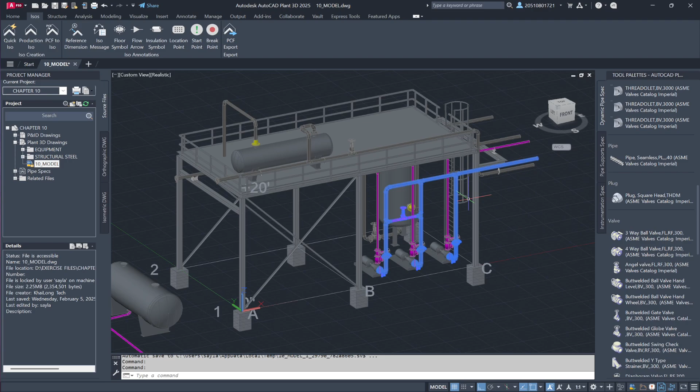Let's open Chapter 10 under Plant 3D Drawings and load the 10_MODEL. Next, locate line 200. Using the Add to Selection option, select the entire line. Right-click and choose Part Hiding/Isolation, then isolate selected parts. This isolates the line that we'll be working on.

Assuming the line is finished, there are several ways to secure it before issuing an isometric. If you need to prevent parts of the line from being moved, especially because it connects to pumps that should not change location, as those pump positions have been finalized and may be referenced in many other drawings, you can lock the pipe in place.

To demonstrate, I'll highlight the first piping run connected to pump C. With the Move Part grip activated, if I attempt to drag the pipe, you'll see it can still be moved. But we don't want that to happen, so I'll undo this action. To fix this, we can lock components in place, preventing any unwanted movement.

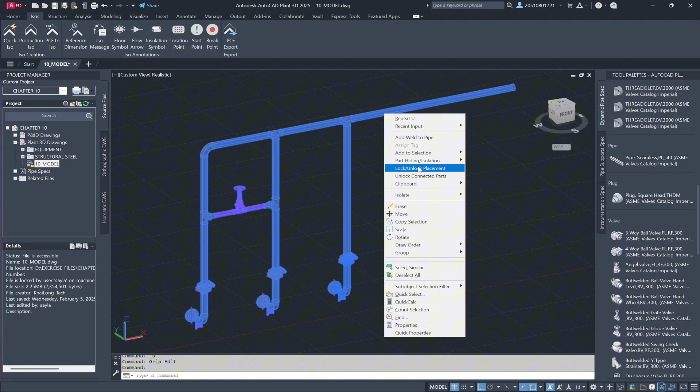When I hover over the line, you'll notice various grips that allow you to move, adjust elevation, or create branches along the line. However, we'll prevent any accidental changes to the line's position by locking it. To do this, again use the Add to Selection option to select the entire line, right-click, then choose Lock Unlock Placement. When the line is locked, small red padlocks will appear.

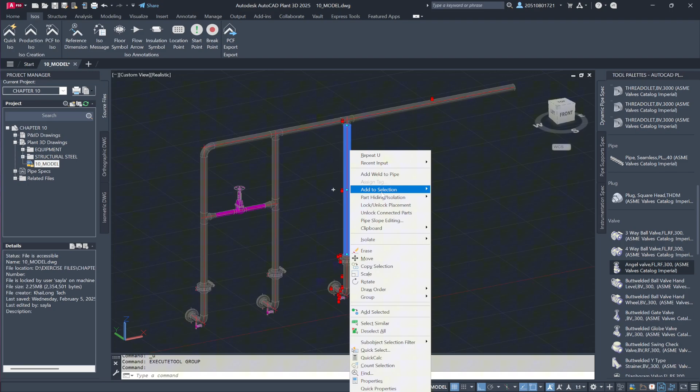If I try to change the pipe's elevation or move it, nothing happens. It remains locked in place. However, you can still make changes within the line, like adding branches or valves. To unlock the line, right-click and select Unlock Connected Parts. This will allow modifications once again.

Now, let's see what happens when we issue the line. If we're satisfied with the final result, we'll go to Production Iso and select Final_ANSI-C. Choose line 200, adjust the settings if necessary, and click OK to generate the ISOs.

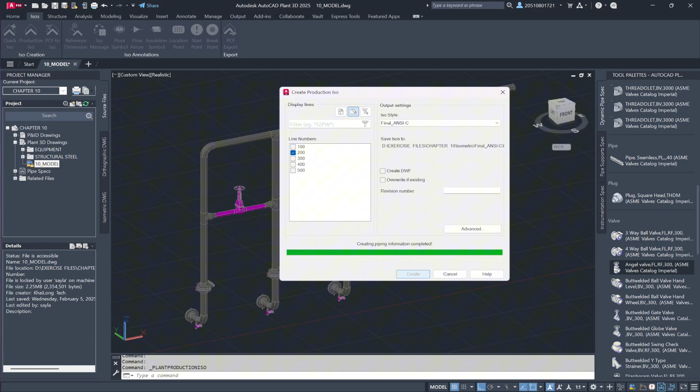After the isometric drawings are created, we move to the Project Manager and check the Final_ANSI-C tab, where we'll see the line with a little plus sign under it, indicating the drawings were produced. Once the drawings are finalized, right-click the line number and choose Lock Line and Issue. A padlock will appear to show the line is locked and cannot be modified.

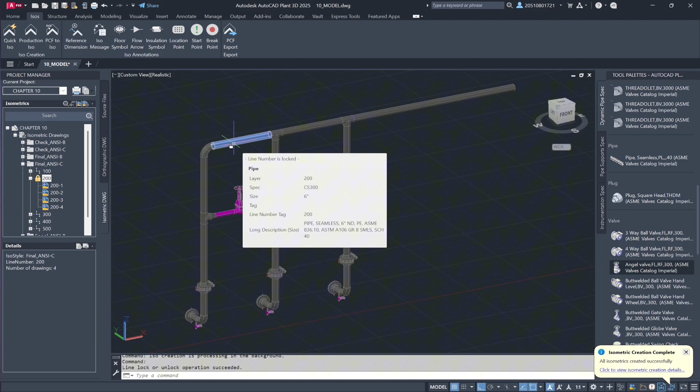Attempting to make any modifications now will show that no grips are available and the line is locked down completely. This ensures no one can alter the line or add components. It's an essential safeguard for team collaboration, especially on large projects with multiple contributors. It ensures the integrity of the design, preventing accidental changes after the line is finalized.